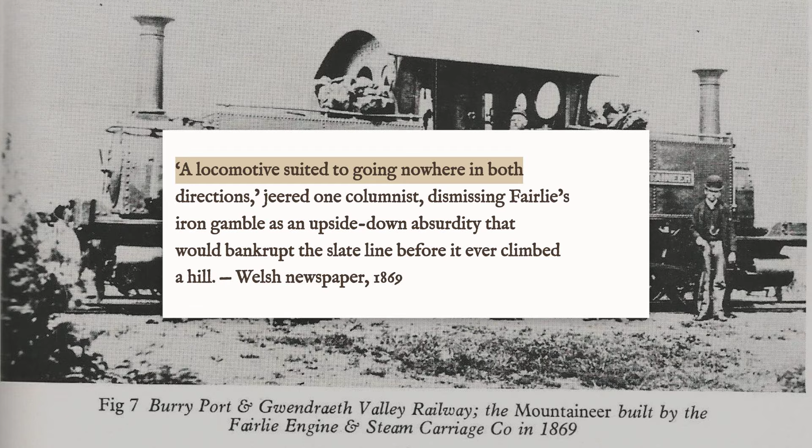Yet here was Robert Fairlie's double-ended contraption, the target of press ridicule, union rage, and engineering scorn. Newspapers called it a backward notion, and one columnist sneered that it was a locomotive suited to going nowhere in both directions. If this machine could haul 40 tons up rails where steam could not breathe, it would rewrite everything: the physics of the mountains, the fate of an industry, and the rules of what a locomotive could be.

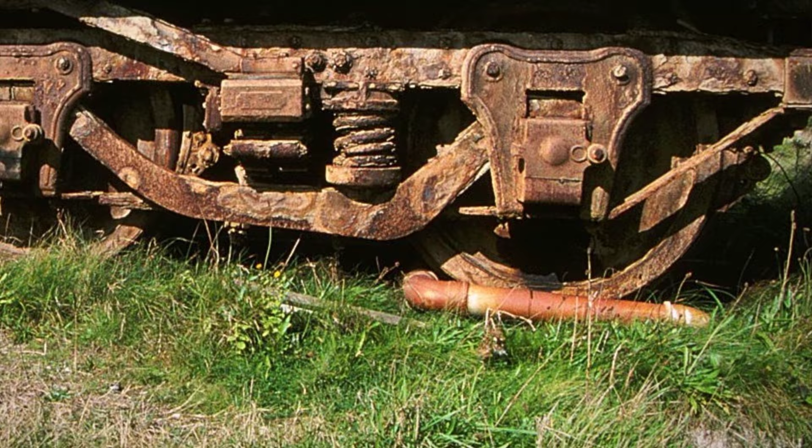But would this folly survive its trial, or would it be buried forever as Victorian madness? The answer begins with a problem no ordinary engine could solve.

Slate quarried from the mountains above Blaenau Festiniog was the best in the world, but every ton had to fight its way down a railway that bent physics to the breaking point. The Festiniog Railway, just under 2 feet between the rails, twisted through hairpin curves only 60 feet wide, barely longer than a city bus, and climbed grades as steep as 1 in 40.

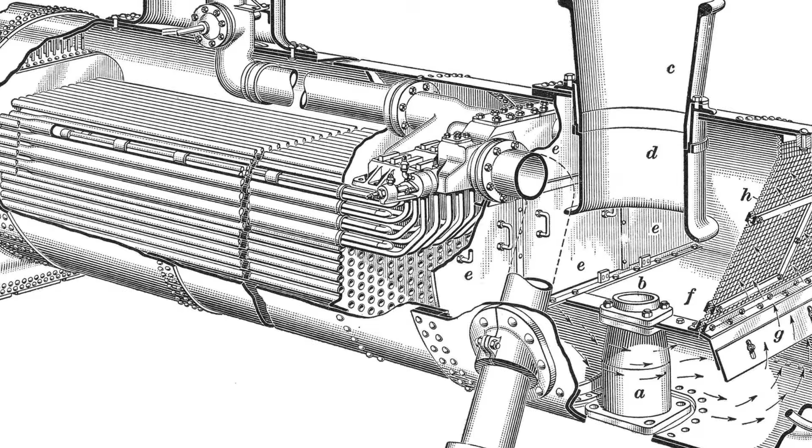On paper, these numbers sounded possible. In practice, they broke machines and men. Conventional steam engines, built for flat ground and gentle turns, choked on these slopes. The higher they climbed, the thinner the air. Fireboxes starved for oxygen, flames guttered, and steam pressure dropped until the locomotive stalled.

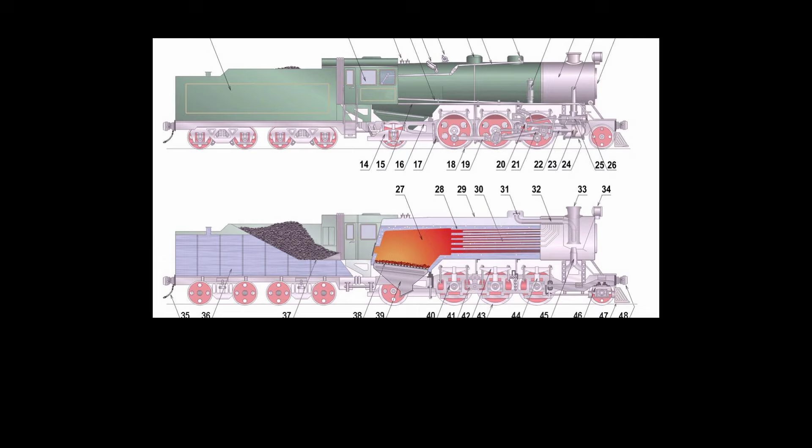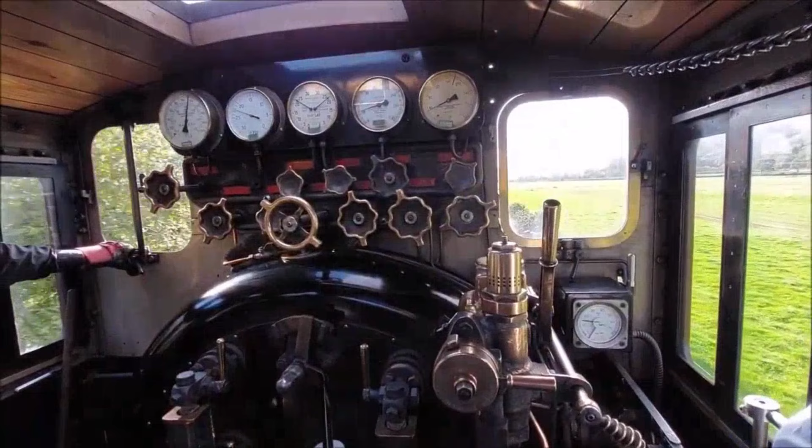C.E. Spooner, the railway's chief engineer, described it as suffocating the fire to death, mile by mile. On the steepest climbs, water in the boiler sloshed forward, uncovering the crown sheet, the thin metal that kept the fire out of the crew's lap. If the water dropped, the crown sheet could overheat and explode. Crews learned to dread every lurch, every sudden drop in pressure.

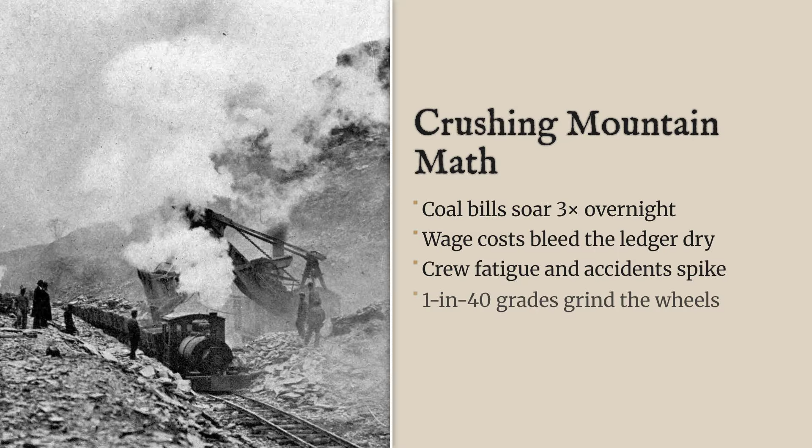The math was unforgiving. A single engine could barely move 20 tons up the mountain. To haul a 40-ton load, the minimum needed to keep the quarries profitable, railway managers had to lash 2, sometimes 3 engines together. That meant triple the coal, triple the wages, triple the risk. 6 men on the footplates, working 6 hours to move a single train just 12 miles. Every extra trip burned through more of the company's shrinking profits.

By 1869, the Festiniog Railway was bleeding money. Slate piled up in the quarries, unsold and unmoved. The cost spiral was relentless. Every extra ton required more men, more fuel, and more time, while the price of slate on the London docks kept falling. The geometry of the mountains had become an economic trap. Something had to break, either the railway or the rules of locomotive design.

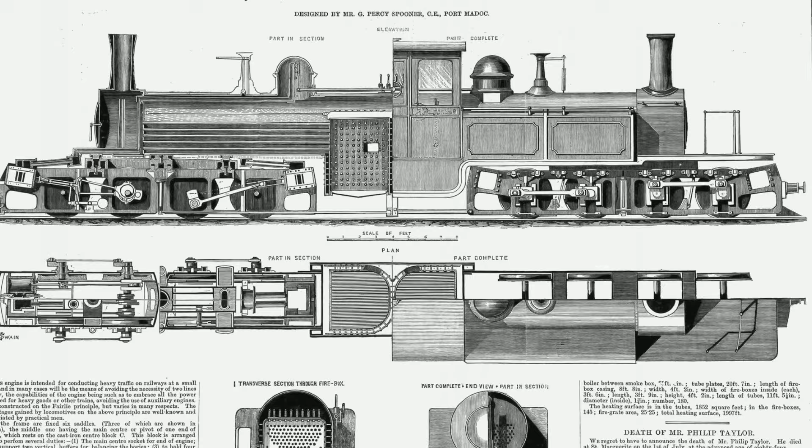In 1864, Robert Francis Fairlie filed a patent for a locomotive that looked like nothing else on rails. The idea was radical: 2 separate engines, each with its own set of wheels, pointed in opposite directions. A double firebox sat in the center, feeding a boiler suspended between pivoting bogies. On paper, the logic was clear: more fire, more steam, better traction on impossible grades.

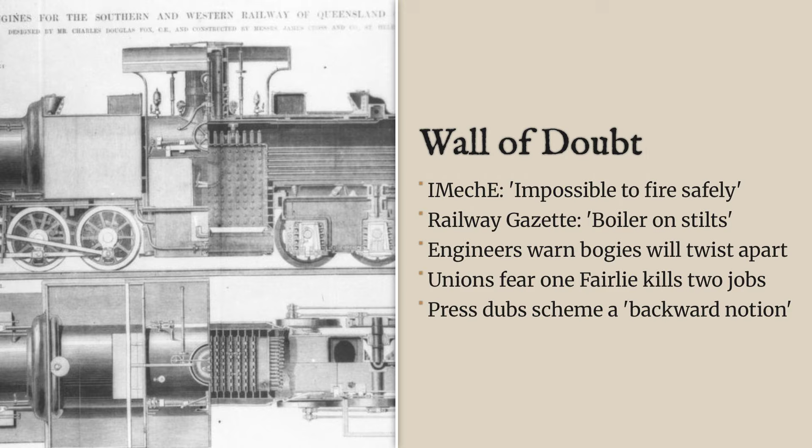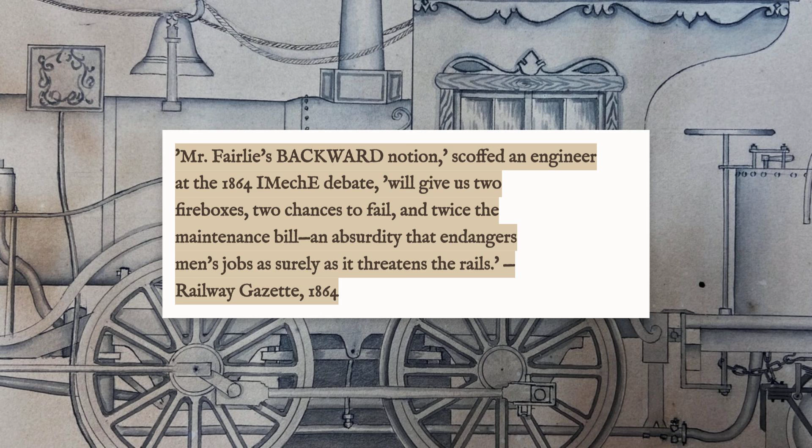But the reaction from Britain's engineering establishment was swift and merciless. The Institution of Mechanical Engineers reviewed Fairlie's patent and responded with open disdain. One member called it Mr. Fairlie's backward notion, warning that double fireboxes meant double the risk of breakdowns and double the maintenance bills. In their official proceedings, another engineer predicted, 'Destructive oscillations will disintegrate the frame.' The idea of 2 swiveling engines, each pulling in its own direction, struck them as an invitation for disaster.

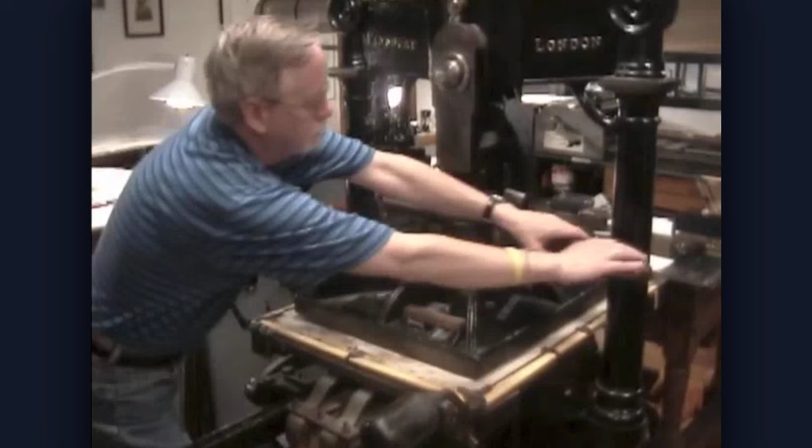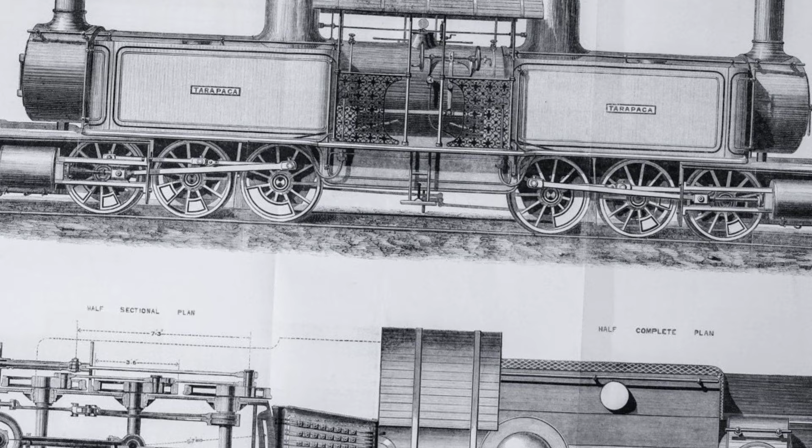The press piled on. The Railway Gazette ran a column calling it a locomotive with 2 fronts and no back, suited to going nowhere in both directions. The Engineering Times published diagrams and equations showing that all that weight hung between 2 pivoting bogies would slip and slide on the rails. Trade publications dismissed the entire concept as an unnatural contrivance.

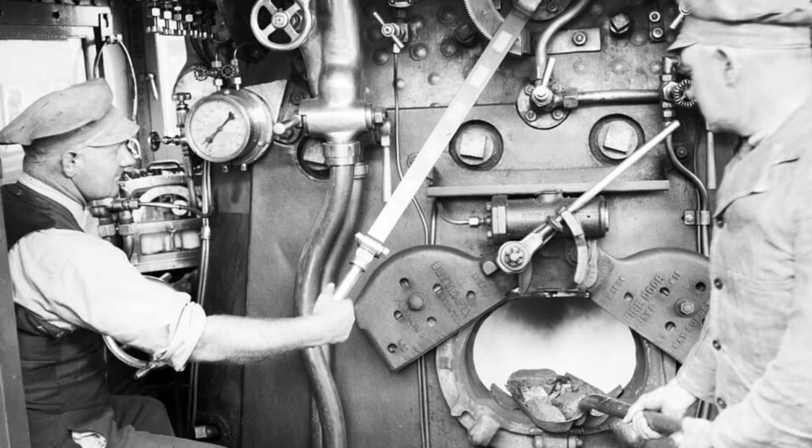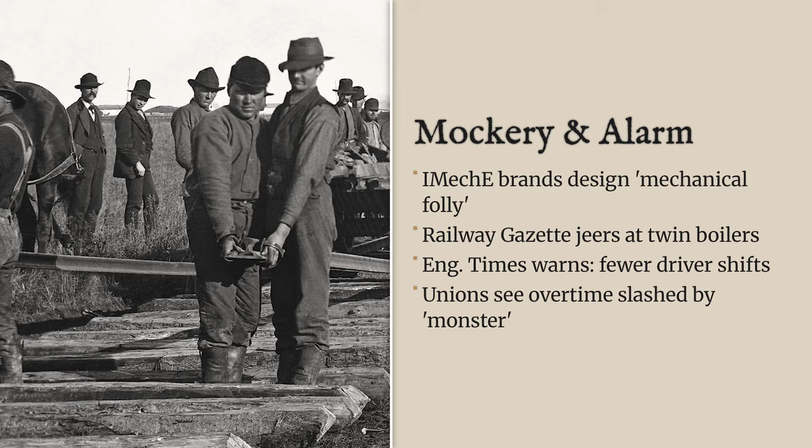Union halls filled with anxious talk. Crews noticed the design needed 2 firemen, but eliminated the need for extra engines and turntables. 'If one of these takes over, what happens to the rest of us?' a union man warned. Helper engine crews read the writing on the wall: fewer jobs, less overtime, and a machine that did not care which way it ran. Some called it a threat to their very trade.

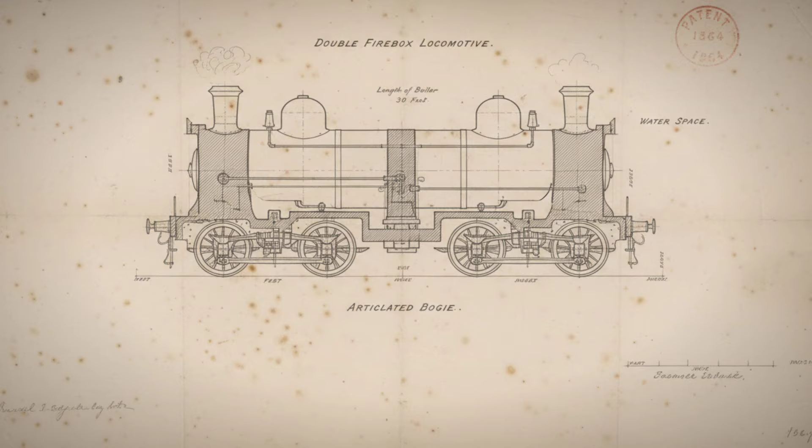Fairlie answered every attack with numbers. Articulation, he argued, let the locomotive follow curves that would derail a rigid frame. The suspended boiler kept every pound pressing down on the driving wheels, maximizing traction. The double firebox, he insisted, was the only way to keep steam pressure up where the air thinned out.

But the numbers did not matter. In the journals and the union meetings, the verdict was nearly unanimous. The upside-down engine was an expensive joke, doomed to shake itself apart before it ever climbed a mountain. Only a real trial under real loads could settle the argument.

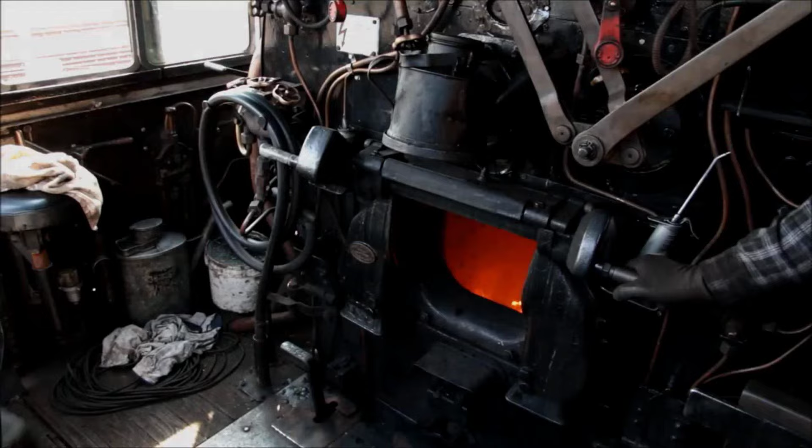Inside the belly of Fairlie's design, everything was built to fight the mountain itself. The central double firebox was not just a curiosity, it was a calculated answer to thin air and long grades. Each firebox sat back to back, each with its own grate and its own fireman. Together they offered nearly double the firebed area of a normal locomotive: 21 square feet in total.

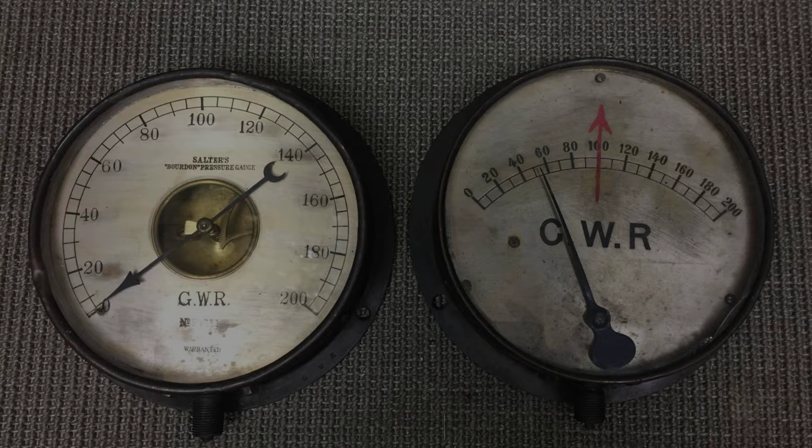That meant more coal could burn at once, drawing in more oxygen even as the air thinned with every foot of altitude. Instead of a single draft gasping for breath, two independent fires roared side by side, feeding a boiler nearly 10 feet long. Heat from both ends drove water to steam with ruthless efficiency, keeping pressure steady at 140 pounds per square inch where other engines sputtered out.

But fire alone did not solve the railway geometry. The locomotive's weight, 25 tons fully loaded, hung from a boiler slung low between two articulated bogies. Each bogie could pivot up to 15 degrees, letting all 8 driving wheels snake through curves as tight as a 60-foot radius. No rigid frame could follow those bends without binding or derailing.

Here, every pound pressed straight onto the rails, turning weight into tractive effort measured at 7,500 pounds, enough to keep 40 tons of slate moving uphill without slipping. Coal bunkers and water tanks rode on the same frame, so every ounce counted for grip.

The engineer's controls stretched the length of the cab, so he could walk from one end to the other, and there was no need to turn the engine at the summit. Every system, from the flexible steam pipes to the twin smokestacks, was engineered to keep the machine breathing and moving where the mountain tried to choke it.

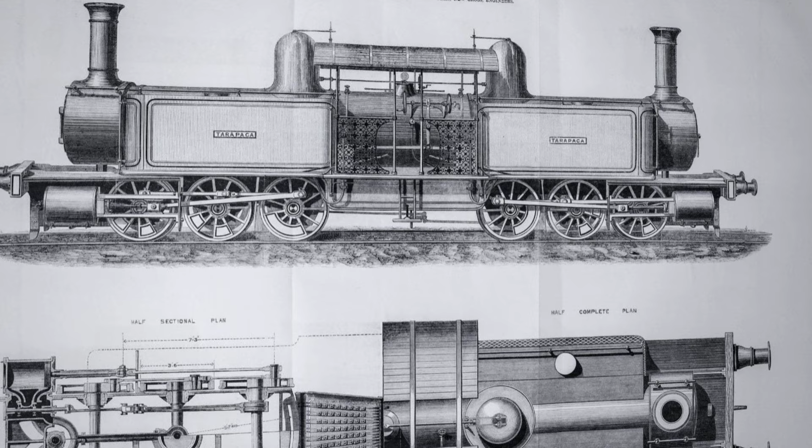On paper, the numbers promised a locomotive built for war with gravity and curve alike. All that remained was to see if the machine could deliver beyond the drawing board.

At dawn, the platform at Blaenau Festiniog filled with railway officials, quarry managers, and engineers who had spent years doubting every bolt of Fairlie's machine. The challenge was clear: 40 tons of slate, 13.5 miles of climbing and twisting track, no helper engines, no turning at the summit. A stopwatch hung from the neck of the Festiniog Railway's chief engineer, ready to settle the debate in minutes and seconds.

Steam built to 140 pounds per square inch. Two firemen, backs to each other, shoveled coal into the twin fireboxes, each feeding a roaring furnace. The regulator eased open, 8 driving wheels gripped the rails, and the double-ended locomotive rolled forward, trailing a full load of slate wagons. At the first checkpoint, the double pulse exhaust echoed off the slate cuttings, two engines breathing in time.

The train began its ascent, a 1 in 80 grade with tight 90-foot curves, the kind that had stalled every other locomotive sent up this line. The articulated bogies pivoted through the bends, each half of the engine following the rails without slipping or binding. The pressure gauge barely dipped.

Skeptics lined the track, notepads in hand. One engineer who had called the design mechanically unsound was soon sketching the articulation system, shaking his head. By the summit, the stopwatch read 1 hour and 40 minutes, less than half the time of the best double-headed run, and with twice the load.

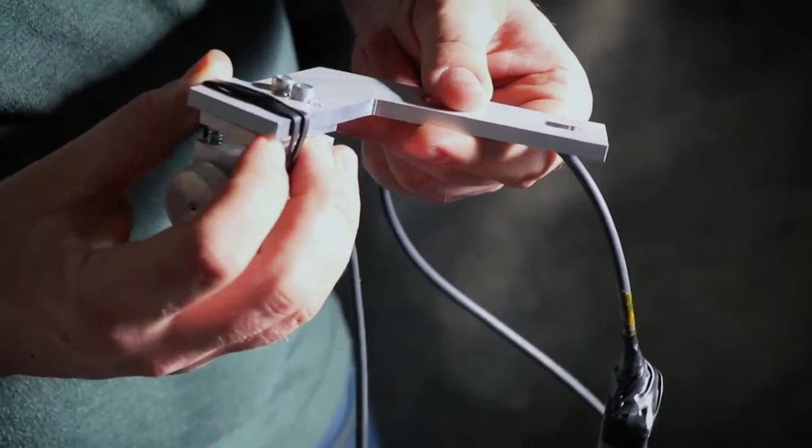Today, Fairlie locomotives still climb the same impossible Welsh grades, 150 years after critics predicted disaster. History shows that the machines we ridicule often outlast the ones we celebrate. The next world-changing idea may look just as wrong until it proves unstoppable. What are we dismissing now?